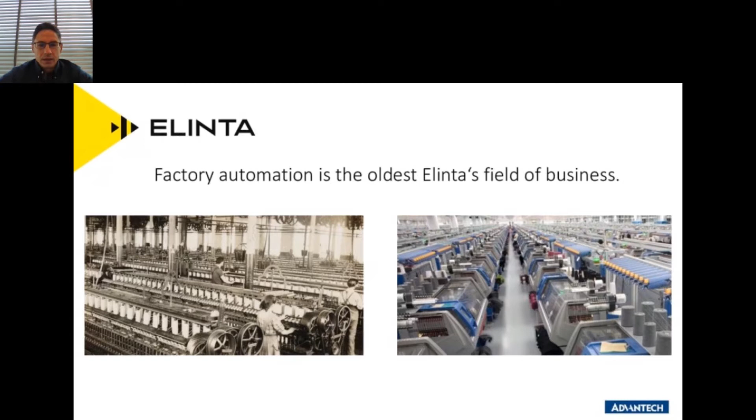In this slide, you can see the transformation we had in 30 years. It's not just because of the time gap of 3 decades, which is quite much, but it's also because of our whole economy transformation. In 1990 we moved from the planned economy to the market economy, so we had a lot of changes in all the economy, including the industry. And today, of course, we will talk about industry.

Much more typical sectors are food and tobacco. We have many small companies in the food industry which produce mostly meat, milk, and fish products, and some of them export, so you can see their products in other countries.

Another big sector is wood processing and furniture. This sector is special because all of the companies working here make orders for the Swedish company IKEA, or IKEA as others say. I think most of you know this company, which makes furniture for homes. So in Lithuanian wood processing industry, most companies work for IKEA, making components for them.

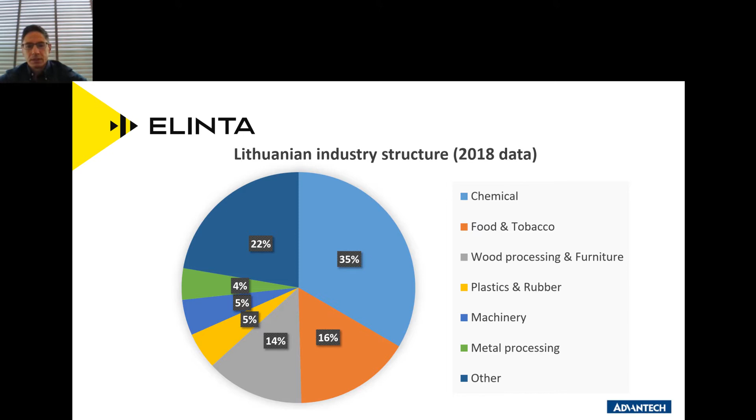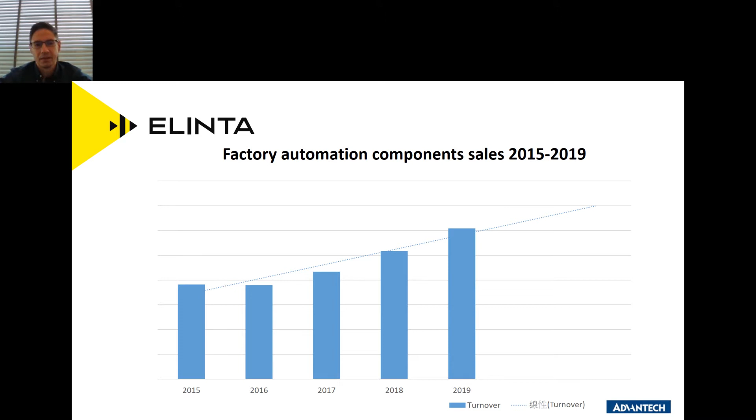Talking about industrial factory automation trends, the hottest topic in Lithuania now is robotization. Today, only 3% of factories in Lithuania have robots. One of the reasons may be, like I told you, in food industry for example, we have many small companies which make quite many products, sometimes in small quantities, so it's harder for them to apply robots.

But it's easier to apply robots for wood processing companies, because, as I said, most of them work for one company, IKEA, so they have standardized products. It's much easier for them to make standardization and implement robots in their factories. So we begin from them, and then hope that other sectors will also follow the standardization and implement robots.

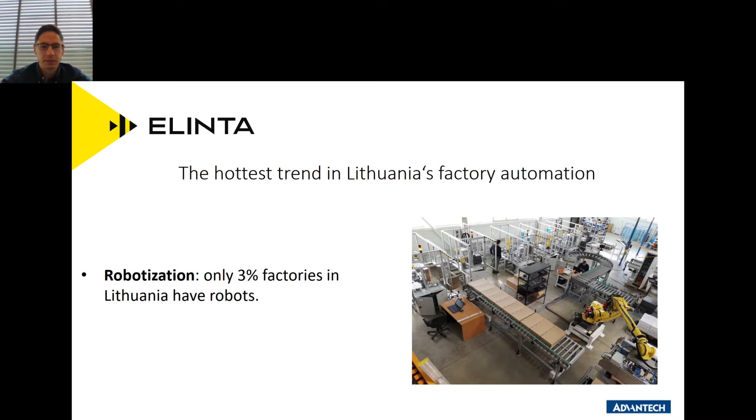And now we are going to industrial PCs usage, and I think I will not surprise you telling that usually customers tend to use industrial PCs under two conditions. The first is that usually connection to the customer's database is required, meaning we need to interconnect the automation system with IT systems. The second condition is that one of the components, whether a PC or HMI, must stand in an industrial environment. So when these two conditions are valid, usually customers use industrial computers.

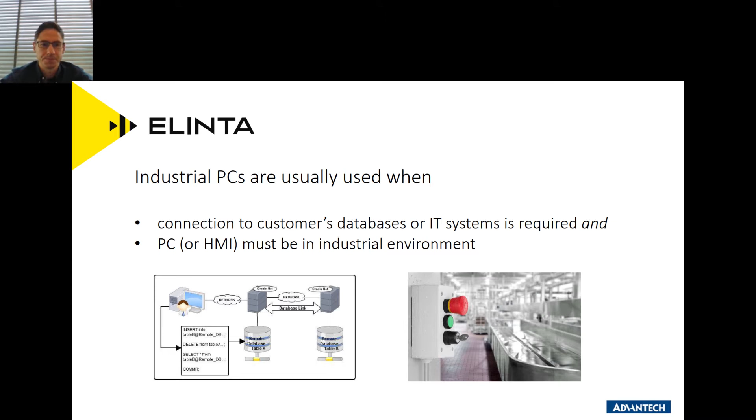Industrial computers are, of course, used not just in factory automation, but also in process automation and some other fields, in some artificial intelligence systems like transportation. I think it's the most popular AI system in Lithuania, for recognition of car plates in parking lots.

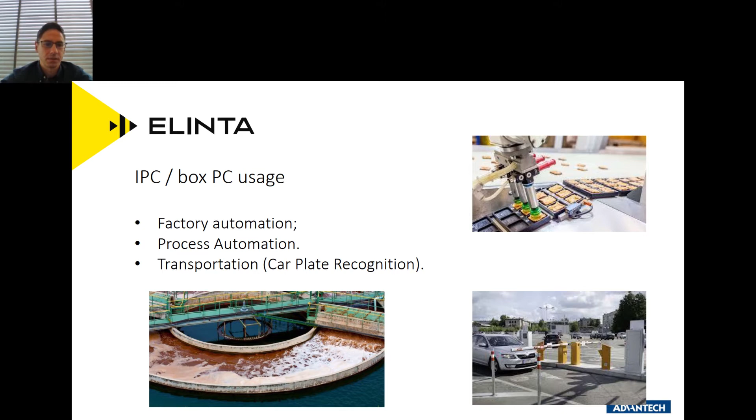Now I would like to share one example of box PC usage from process automation. There was a request from a Lithuanian power grid operator to have a rack mount PC which would be fanless, have 110 volts DC, two redundancy power inputs, and be compliant with power substation standards. Advantech has a solution, the UNO 4600 series, for this case, and this project was made with these PCs.

Other examples - we are getting back to factory automation, with data acquisition, so-called DAQ modules, the modules which collect data from the sensors to the PC.

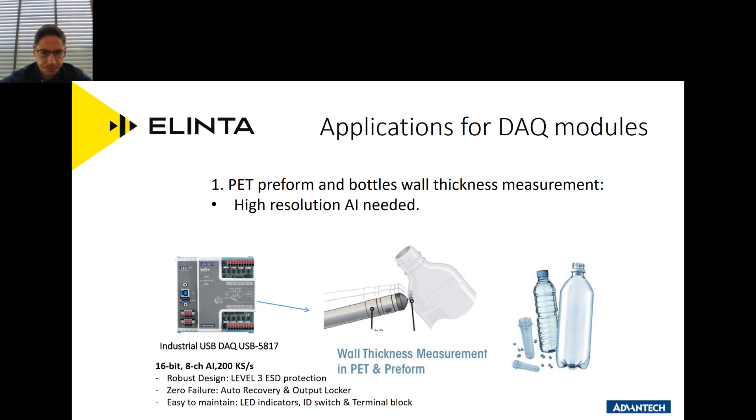And another application is a device called FertiScan.

It is made by our subsidiary company called Elinta Robotics. You can also find more information on their website about FertiScan. This is the device which analyzes fertilizer granules in line.

Remember I told you at the beginning we have 2 big chemical companies which make fertilizer granules, and they use this kind of device. This device is very good because the customer doesn't need to stop the line, take the sample, bring it to the laboratory, and wait for the results.

This device works in line together with the whole line. And this device uses a vibrating conveyor, and we need an analog output to control the speed of the vibrating conveyor. The vibrating conveyor is used to take the sample from the line, and in this case, we need an analog output card to control the speed.

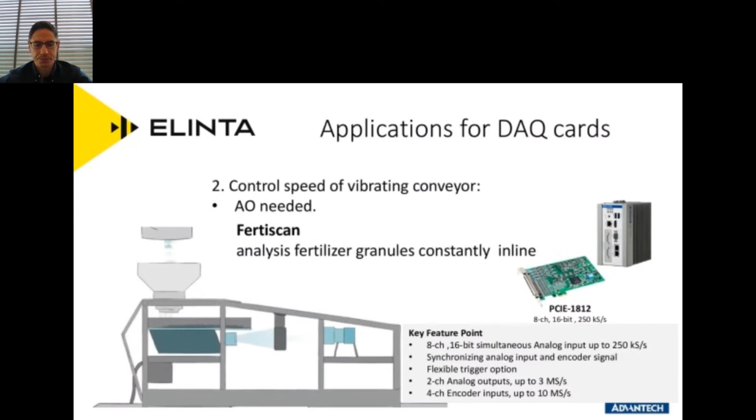Advantech has a solution, the PCI Express card with 8 analog inputs, PCIe 1812. So with this card, we can transfer the signal from the PC, from the control system, to the vibrating conveyor to get the speed we need.

And another application with HMI and remote I/O. This is an application when the customer already had its PC, its database, and it is part of the IT system, and a PLC, existing PLC on an existing automation system, and they needed an HMI which should stand in an industrial environment, so we used an Advantech FPM monitor.

And also to collect remote inputs and outputs to the PLC. The PLC was Siemens with Profinet protocol, so we used Advantech Adam 6100 PN modules, which can collect remote inputs and outputs via Profinet. So that was an easy implementation.

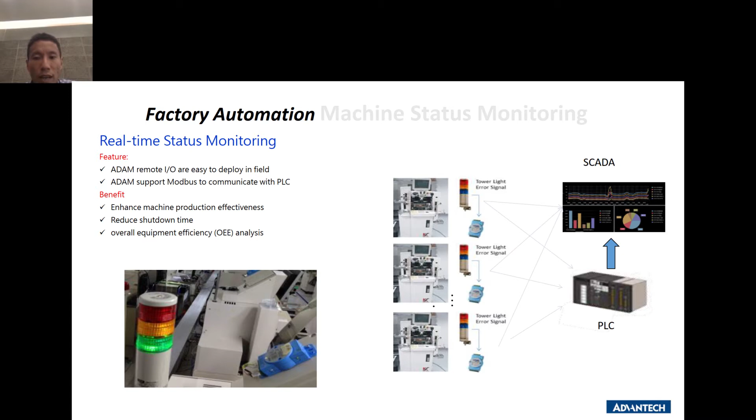The alarm signal can be immediately sent into the PLC, so we can take advantage of the features of ADAM to enhance machine effectiveness and reduce shutdown time, and finally perform overall equipment efficiency analysis.

Besides the existing PLC controller, we would like to introduce another comprehensive PAC controller with I/O. The field side controller is facing an important challenge caused by Industrial 4.0. Controller PLC is weak at communication and data handling, with key requirements for Industrial 4.0 applications.

The current solution is a two-pieces solution, having an IPC on top of the PLC. Engineers would expend unexpectedly more effort on interface communication between these two devices.

Through semiconductor technology and CPU advances, why not use the extra CPU resource to handle additional PLC tasks? Another common thought is, why not just build a powerful CPU into this kind of controller form factor? That is the evolution generation controller, and we call it PAC, Programmable Automation Controller.

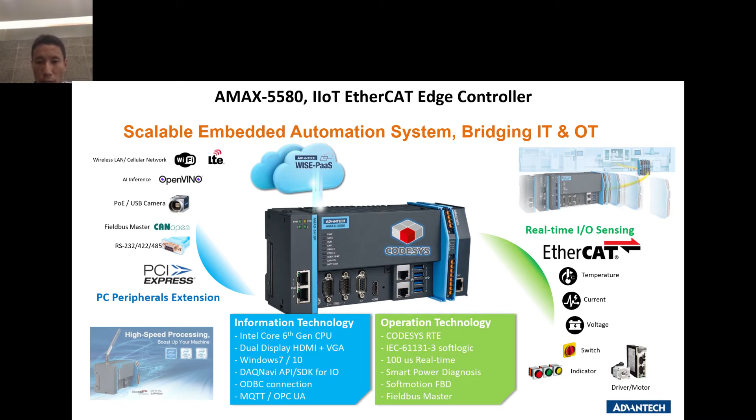On the left hand, we also leave the possibility for communication expansion, such as RS-232 connection devices. Most exciting is we also provide wireless communication and industrial connection. This small but powerful controller could really help.

They needed a PAC controller for each production line. They required it not only for peripheral devices, but also to collect data. A distributed I/O system, AMAX-5580 with Codesys, provides then a whole new solution instead of IPC plus PLC. They can easily integrate all the variables in one program and show them on the local screen as well as the remote screen.

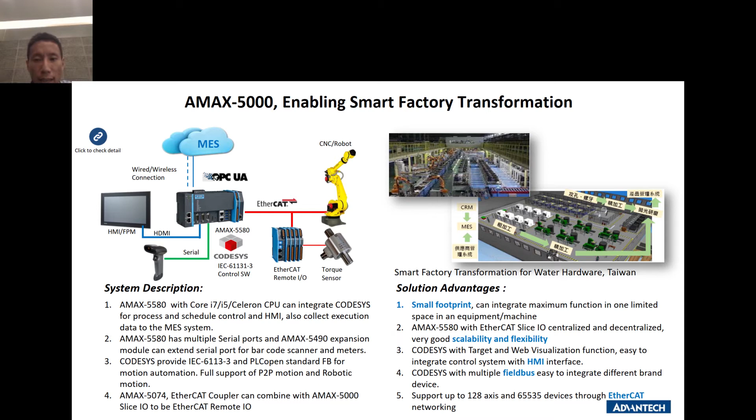in the situation room. Now, its scalability and flexibility also leave the ability for future expansion.

Please start with... okay. If I/O on AMAX-5580 is still not fast enough to satisfy your application, like test and measurement applications, Advantech PCIe DAQ boards, USB 3.0, and the iDAQ series are your best choice.

Here, I would further like to introduce the iDAQ series, a new product line which will launch soon, early next year. Advantech PCIe DAQ boards provide a reliable solution for installing inside

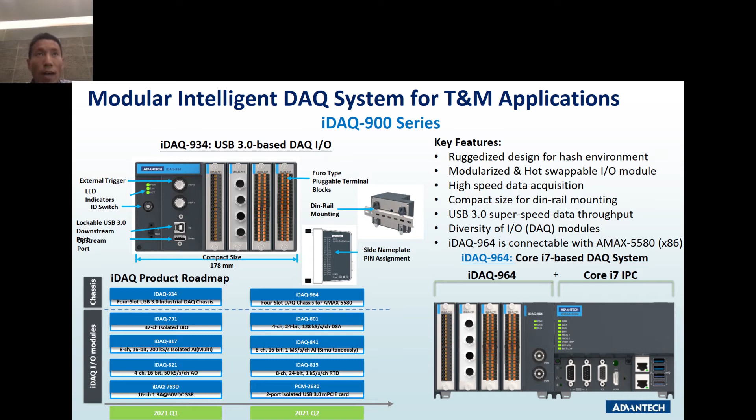Its front is accessible with hot-swappable features. It can be a USB 3.0 I/O rack for you, or it can integrate with an AMAX Core i7 controller as a DAQ system. DAQ solutions come with an SDK called DAQ Navi for coding and review by users.

For machine monitoring applications, we also provide the DAQNavi MCM software package. The DAQNavi MCM software provides algorithms like FFT, RMS, peak values, and digital scope functions.

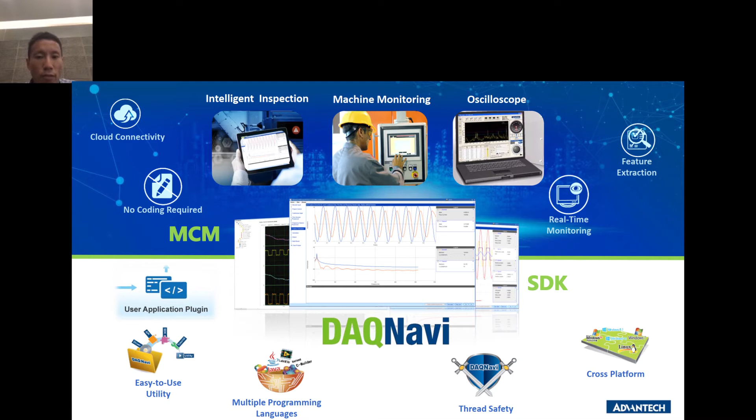So no coding is necessary. And another new feature called user application allows developers to retrieve MCM data from data tags, which will periodically push subscribed data to a user program such as analytics.

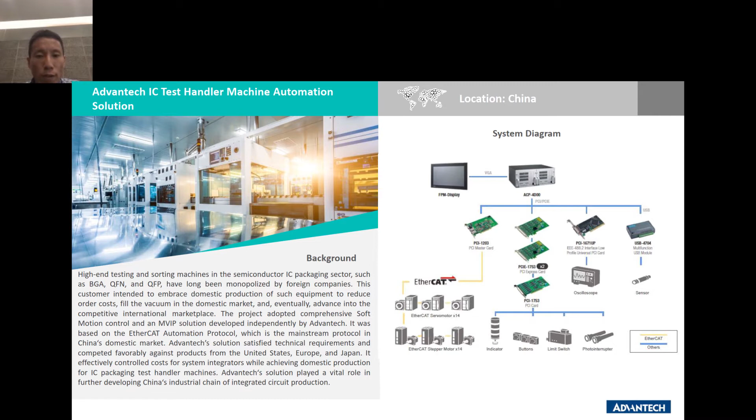Like the PCIe 1753, which controls 96 peripheral limit switch devices in time. The high-density DIO card satisfies precise requirements, along with the 1812 and the PCIe

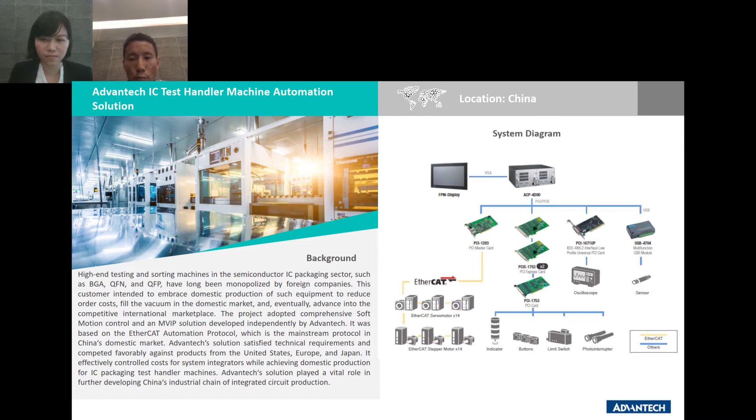With Advantech's comprehensive solutions, customers can easily build probe and test machines. Thank you, that's my presentation.

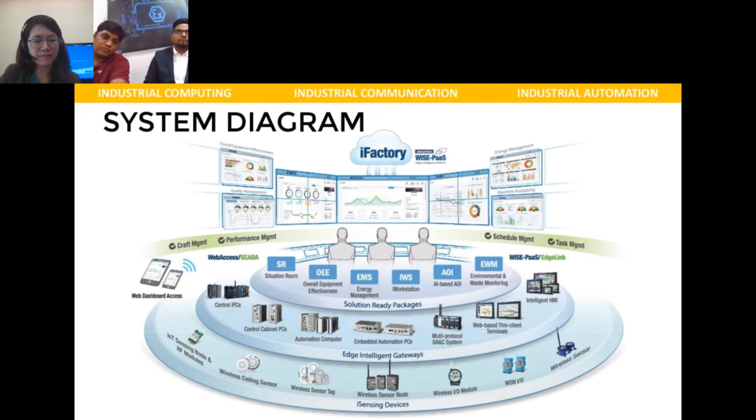If you go one layer above, you can see the SRPs like energy management and overall equipment effectiveness, OEE. These are all the solution ready packages which consist of the same number of hardwares used for different solutions.

Here there is one use case for OEE, where this customer doesn't want to go for the cloud, so we have an on-premises OEE solution. This was for leading steel fabricators and structures manufacturers in GCC, who were starting a new plant with smart factory solutions.

What they faced was a lack of engineering resources, and the need for remote monitoring systems and alarm notification tools, because in steel manufacturing, each time a cycle is completed, they want an alarm, since they use forklifts and cranes to remove finished items, along with raw material shortages. So there was a time delay happening every time.

What we provided was an intelligent server with a WISE agent and tags, so they can do edge sensing from the field and deliver what they want. The good thing about this WISE-PaaS platform is, among many factors, that it is customizable, and we can design it per customer need, and it's cross-platform.

You could have learned more about the products and technologies from the previous session. So that's why we just have one use case in UAE, though there are many more in our POC cases. Maybe in the next webinar like this event, we will add more cases for factories. But for other ranges, we have a greater number of success cases.

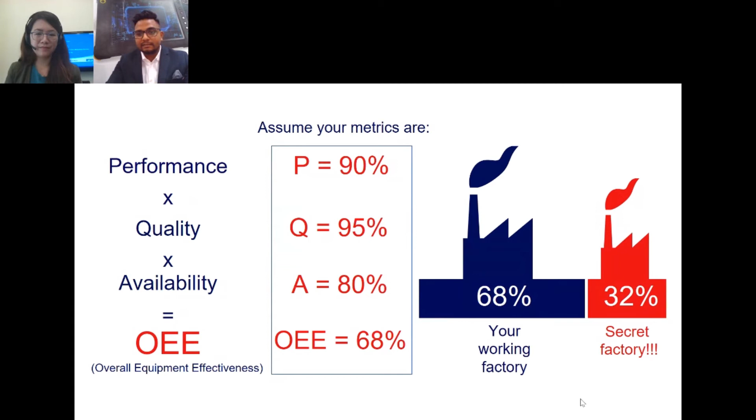On this picture, you can see the regular situation for companies - more than 30% of capacities are indeed the secret factory. In general, they are producing and utilizing up to 68% of the capacity of the factory.

Our words are proved by different sources of research. For most companies, OEE hardly reaches 60%, as you can see on my screen, though there are leaders who achieve OEE up to 85% and more. What can we learn by investigating the best practice in utilizing secret powers?

To begin with, let us recollect 6 basic big losses: stops and slowing down of production, late and wrong identification of quality deviations, weak managing of technical parameters. We often cannot identify equipment illness or early symptoms, and it leads to breakdowns very often, as well as planned downtimes that have to be as short as possible if we need optimized production.

But how to fix all these things? How to fix all those problems? There is a solution. First of all, I think we don't need to hurry to find the systems in the market - there should be a step-by-step approach on the digital way to help you.

To have your factory manageable, we advise to implement hardware solutions of Advantech to collect initial data from equipment at your manufacturing house or shop floor, and to process the data with the help of Clobbi applications or software solutions. In this way, you will start from functions like technical parameters monitoring and then implement smart factory. As a result, we get the total digital twin of the entire production.

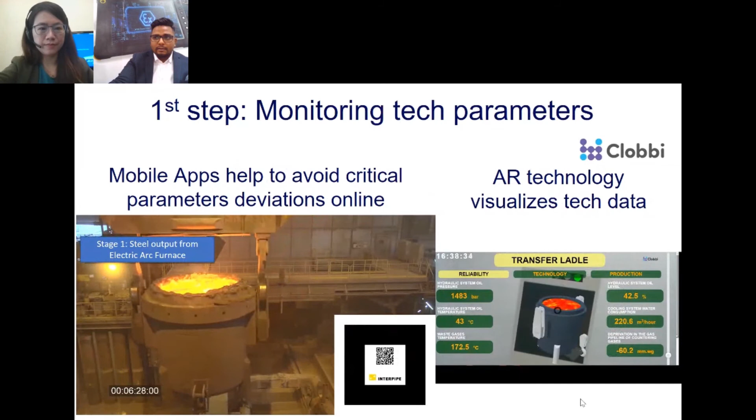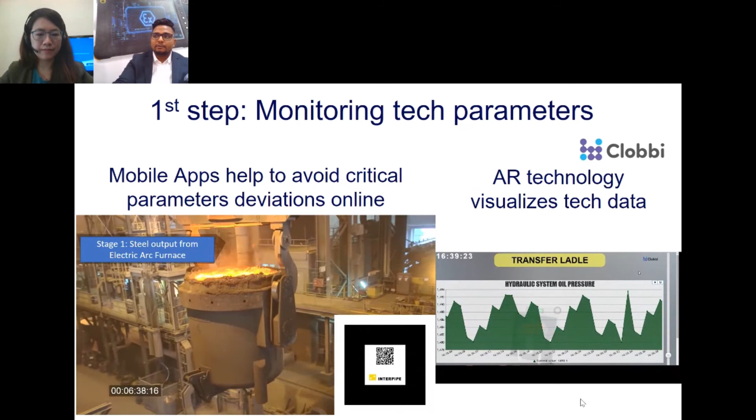As you see on my typical screen, the first step is monitoring the technical parameters. Clobbi mobile applications help you to visualize online dynamics of characteristics under control. You just scan the QR code on the equipment and choose inspection parameters. You don't need to look for any special experts or special journals. Any normal manager on your shop floor can instantly react to deviations and correct the technological parameters if something is going wrong.

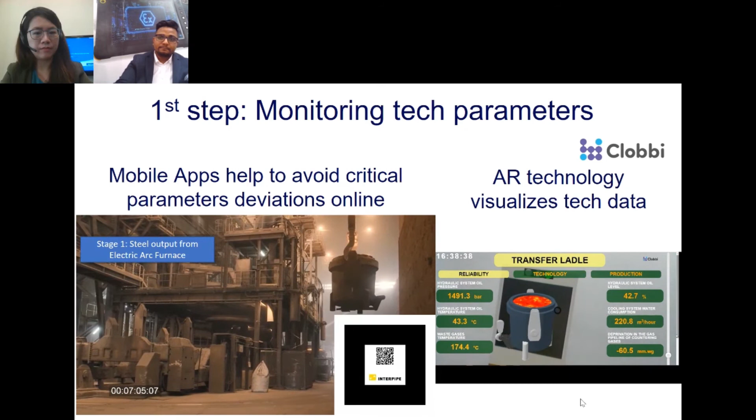The second step is implementation of the smart factory solution. Hardware of Advantech in cooperation with the Clobbi software allows you to model accurate schedules, to issue work tasks with respect to workers, work centers, technology, etc. Advantech provides data delivery to the shop floor and feedback from the equipment. Clobbi MES application ensures communication among workers using artificial intelligence technology. This helps to reschedule manufacturing, considering all restrictions and possible scenarios, and compares it to the target KPIs. The entire solution gives you tools to increase production up to 20 to 50% at existing capacities.

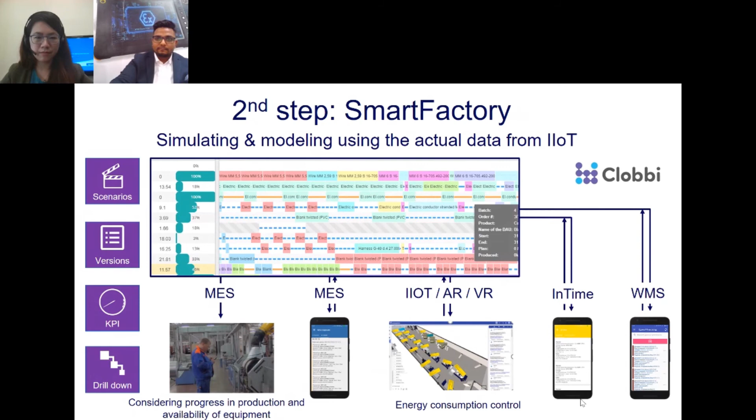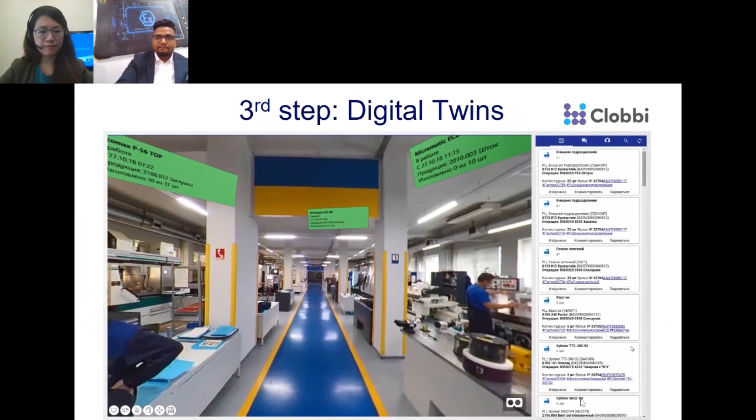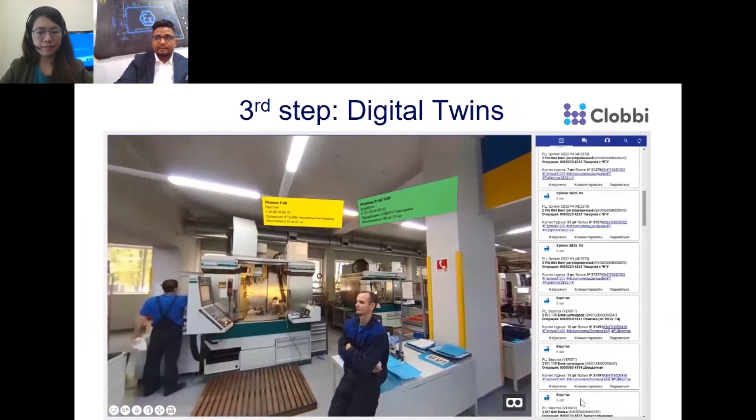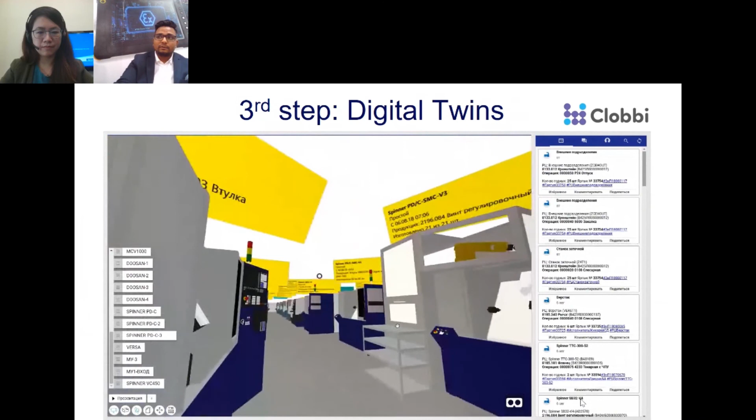So given you implemented IoT monitoring and the Clobbi Smart Factory solution already, nothing prevents you from creating a digital twin of manufacturing. Today, everybody knows that augmented reality and virtual reality is a trend, so we have tried to implement the same in the Clobbi solutions. AR and VR technologies serve you to survey workflow and switch through 3D cameras between real and virtual production. The digital twin at the same time can be used as dynamic dashboards, visualization of linked tech problems. You can use it as an inspection tool with access to the initial data, and you can have chatbots based on artificial intelligence as a forecasting tool to answer what will happen if some changes happen in production.

Suppose you want to install several work centers to eliminate bottlenecks. But how to do that? Well, there is an approach using digital twin solutions. It can give you an easy way to simulate and prove your guesses.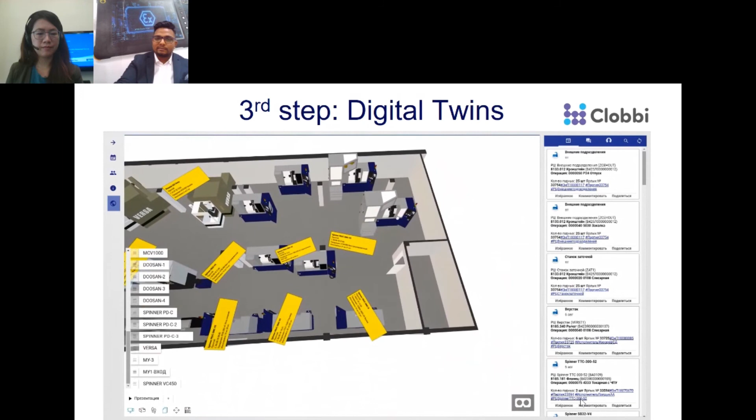As you can see on the video, before you buy any new equipment, you can simulate and understand how the capacity or production output will grow, and what will be the consequences if you add two equipments, two production lines, or three production lines. Check the new plan and you will find an answer to your assumption. Sometimes you will find unexpected new bottlenecks as a challenge, but anyway, you will spare time and money with the digital twin solution for sure.

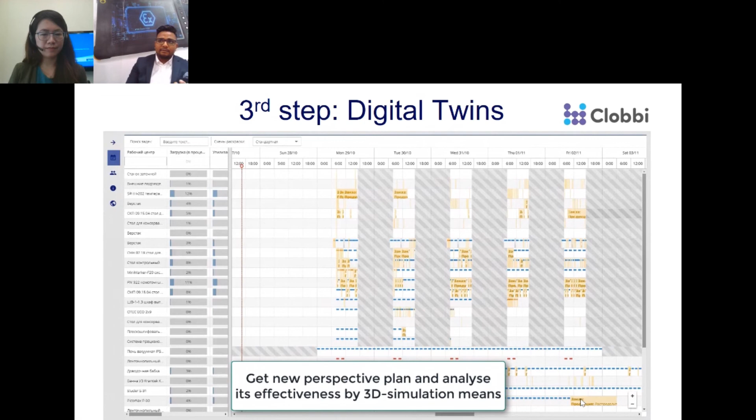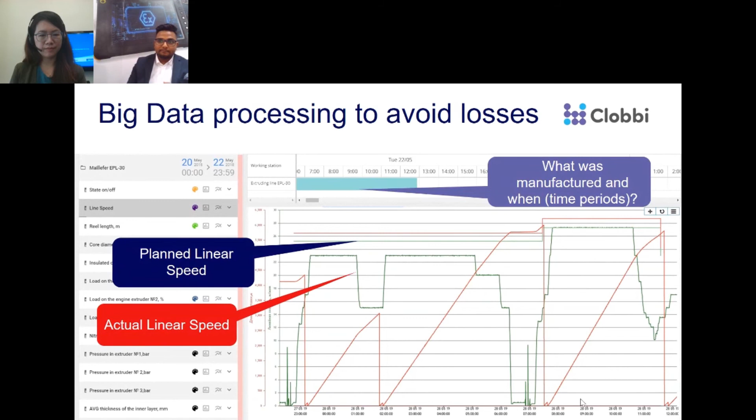Talking about availability, I will say this is managing the availability without the voodoo factor.

The early symptoms of equipment problems are hidden from human perception. You cannot see what is happening at your equipment, and there is no technology today where equipment speaks up and says, I am ill today, I don't want to work. So we need to talk to the equipment in their own language, and that language is software algorithms using artificial intelligence or machine learning, and hardware devices to connect to the equipment, so they can speak up to you.

Clobbi has a special application called Smart EAM, Enterprise Asset Management, which with the help of IoT devices can communicate with your equipment and predict deviations. According to research, a maintenance approach using diagnostic tools combined with predictive solutions leads to more than 90% availability index, and it helps you avoid unnecessary breakdowns.

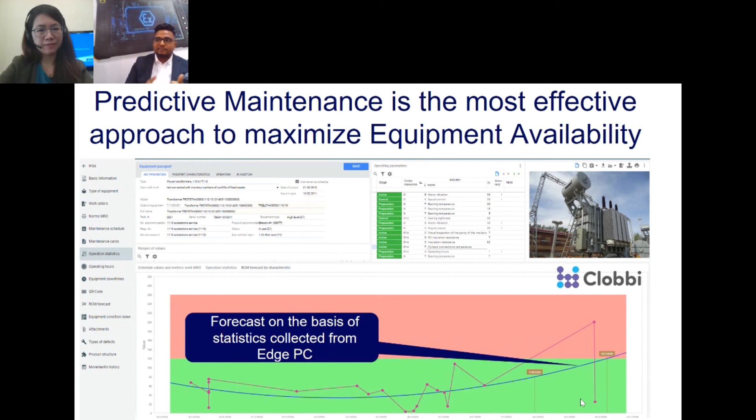The algorithm itself will help you predict the health of this particular spare part, either at what stage you need to replace it or at what stage it's going to break down. This is a key point for predictive maintenance - if you definitely know at what point or which spare part is going to break down, then you can plan the replacement or maintenance process in advance. At the same time, the system makes it easy to arrange every step of your maintenance process.

Talking about quality - I'm pretty sure none of you will dispute that managing quality matters when it is online, in real time. The faster you recognize violation of tech parameters, the better quality you will produce and more profit you will make. And of course, if you're making better quality and more profit, that means you're going to achieve more loyal customers.

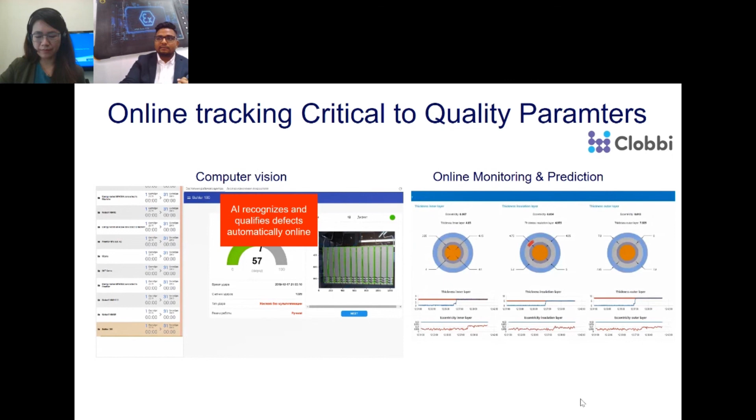As you can see on this screen, I am mentioning critical to quality parameters. Clobbi and Advantech solutions help you implement quality scanning with the help of IoT devices and computer vision for detecting defects. Artificial intelligence algorithms recognize and qualify deviations online, so you can handle problems at the right time, avoiding breakdowns or defected products.

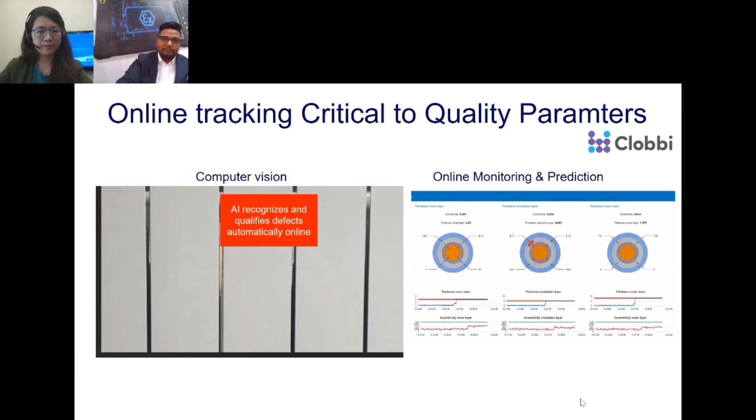IoT devices online discover critical to quality parameters, as I mentioned already. You are welcome to survey details, trends, and analysis. It is more comfortable to exclude deviation factors using the Pareto approach, from more impacting troubles to less significant ones.

As a last point, the solutions Clobbi offers our customers are modest, but some figures they declared: this solution helps companies achieve reduction of material consumption up to 5 to 10%, reduction of rejections for quality reasons up to 15%, and increases equipment operation time by approximately 15%. Some of our clients boosted OEE, overall equipment effectiveness, by 10 to 15% as well.

As a conclusion, I would advise starting digital transformation with us according to the Industry 4.0 concept. To begin with, you have to get in touch with our team and receive our help to make a digital roadmap. Thank you for listening, and if you have any questions, you have my contact details on the screen.